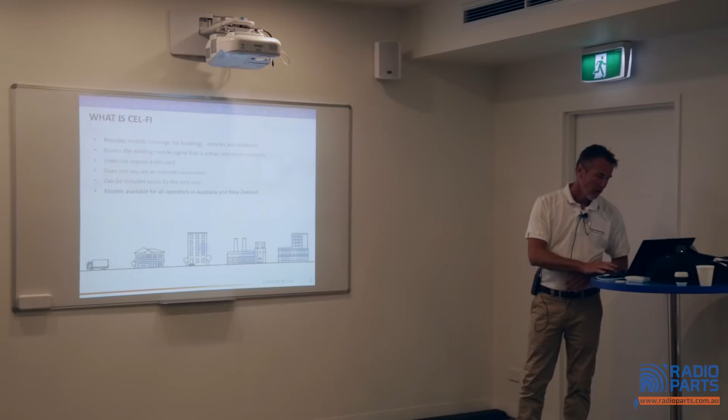What we're looking at here is a Cel-Fi. It's basically providing mobile phone coverage in buildings and in areas, vehicles, outdoors, indoors, in areas where the mobile phone signal is difficult. Sometimes that can be due to construction, location, lay of the land, etc., or even being in a regional environment, especially being out of range of the mobile phone signal towers.

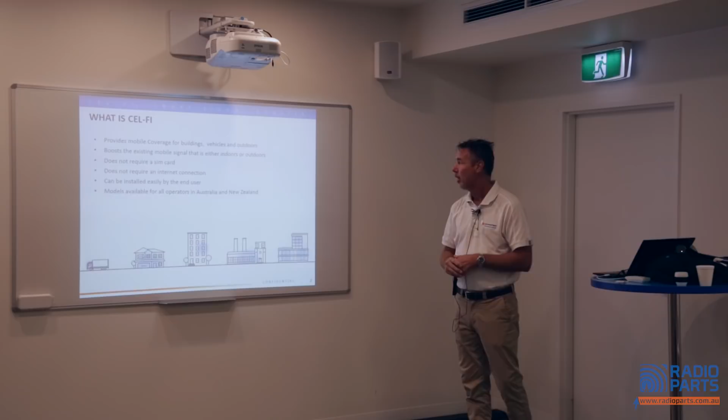The devices don't require a SIM card, so they're basically grabbing the mobile phone signal, reboosting that, and then broadcasting it back out. So I can't say Adam's phone can connect, Mike's can't, Geoff's can. It's basically rebroadcasting a mobile phone signal as it would be broadcast from the tower. They don't require an internet connection, so it's basically taking the mobile phone signal from outside or from a long distance away, grabbing that signal and rebroadcasting it out. Some of them are plug and play, others require installation, and we cover all the operators in Australia, New Zealand, the Pacific, etc.

These things are the only legal boosters in Australia, so everything else, if it doesn't have a Cel-Fi logo on it, is illegal. They need to go through a very extensive certification process, firstly with ACMA to make sure it fits within the guidelines of what frequencies it's going to operate in, and then to the mobile phone carriers using the identifications of their network to be able to work.

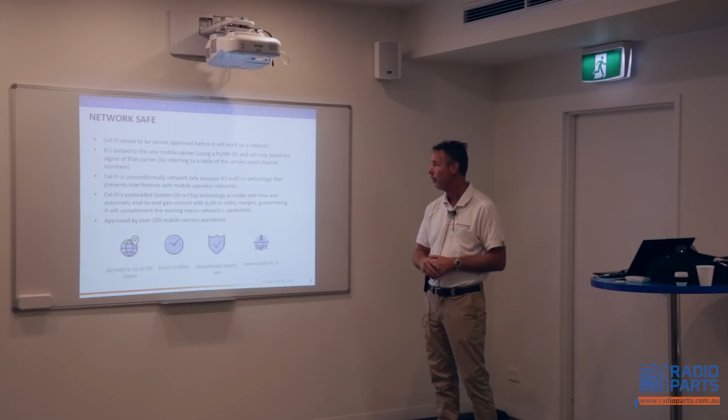So the Cel-Fi itself, while they look the same, has different hardware and configuration inside for the different carriers. So one that's suitable for Optus won't work on the Telstra network and vice versa. They're an independent box, with a slightly different chipset inside them, and can't be changed. They can't be reconfigured to work on the other networks. It's unconditionally network safe because of the technology it uses.

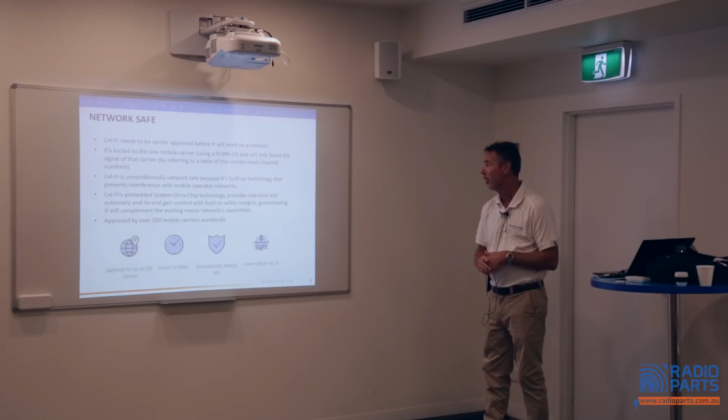And we were talking about before, that tromboning effect, over amplification. These things continually monitor the input and output, so the two antennas, if you like, and make sure that they can't see each other and start to create this tromboning or oscillation effect. It's an on-chip system, which is quite expensive to develop. It's patented. It's been a long time in development, and hence the hardware isn't cheap.

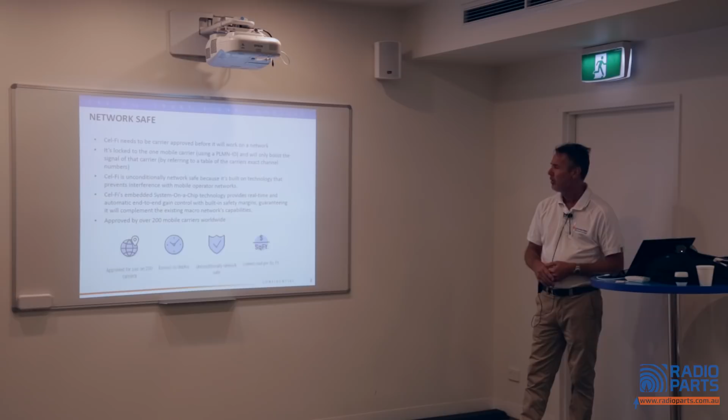So the cost of certification and approval, the cost of the technology and the development in the technology makes these things not a cheap item. So you know, you can't go and buy one for $100 there, like you could with the illegal boosters. And it's approved by carriers everywhere. As I said, some of them are plug and play, others aren't.

There's not many options when it comes to boosting mobile phone signal. You've either got what we have here, or an expensive, what we call a distributed antenna system, which is a license-based thing that a carrier would come and deploy. It's got a lot of hardware antennas strategically located around. You know, you're looking at minimum $350,000 to deploy a DAS, or a distributed antenna system. So the only options then are the products that we're going to look at now.

The benefits to the mobile phone operators are obviously new customers. You know, the customer goes and buys a plan, they spend $100 a month, but they can't use it in the house, so sometimes the carrier will say, here, take that, and set it up, plug and play, and away they go. It can help with customer retention, so if I had signal before, yet I've moved to another place and now I don't have mobile phone signal.

And it's a cheap way for the carriers to extend their network. And it can provide temporary coverage in areas for events or functions where mobile phone signal's a problem, where we've got a lot of people joining in to a particular function or event.

The range of the models that we have, and I'll go over and explain in a little bit more detail. What we talk about here is the bands, so the bands that the product will work on. These are the frequencies that it works on, so we have a 4GX, 3G, and 4G for Telstra. We have 3G, 4G, and some of the other 3G and 4G bands for Optus and Vodafone. These boxes here we call the Cel-Fi Pro. They'll boost 3G and 4G at the same time. And they're basically a plug and play item.

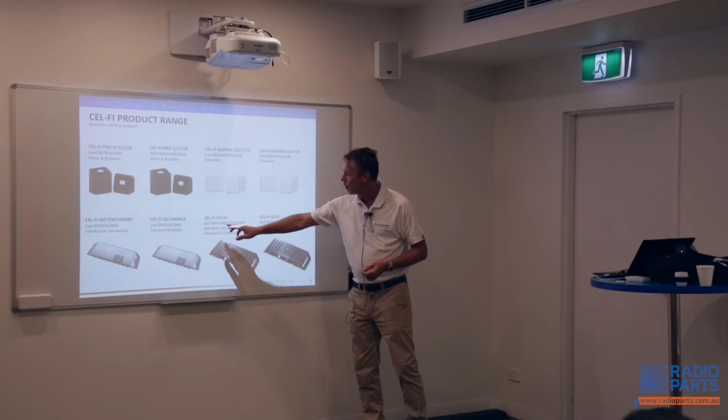Cel-Fi Go M and the Go X, these boost 3G and 4G at the same time, and are designed for Vodafone and Optus, and they have an IP rating, which means they can be installed outdoors. Splash, dust and shock resistant. Whereas these guys, you can basically plug and play with those. These require an installation, so they require what we call a donor antenna, getting the signal from the tower, and a server antenna, which is providing signal to the devices.

Cel-Fi Pro, just a basic example of what these are. We talked about it before, a network unit, which is grabbing the signal from the tower outside, communicating via an uplink and downlink in the 5 gigahertz band to the coverage unit, which is then putting out a signal bubble to provide coverage in that location. For indoor applications only, set up easily within a few minutes.

So you plug them in. This one looks at the tower, says, "Yeah, I'm a Telstra box. There's a Telstra signal. I've got that. I can see him. I'm talking to him." Bang, there it goes, and you'll see instant signal boosting on your phone. As the statement says there, the signal bubble or the output signal can't be greater than the distance between the 2 boxes. Okay.

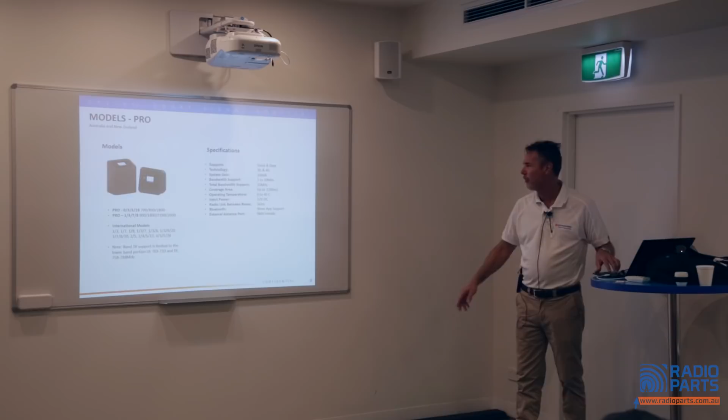A bit of the specifications on the things. So we've got a Telstra and Vodafone version, or Telstra Optus Vodafone version. You can see the different bands that they're supported, which means there's different chipsets and hardware inside the boxes. A whole range of international models as well. Suitable for voice and data, so increasing the ability to make and receive calls on 3G and 4G. High level of gain.

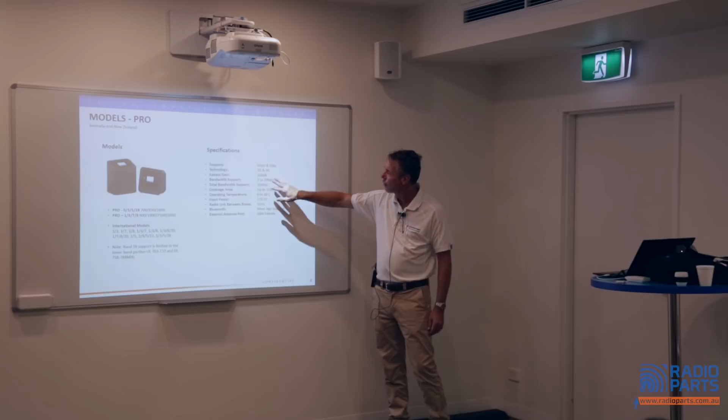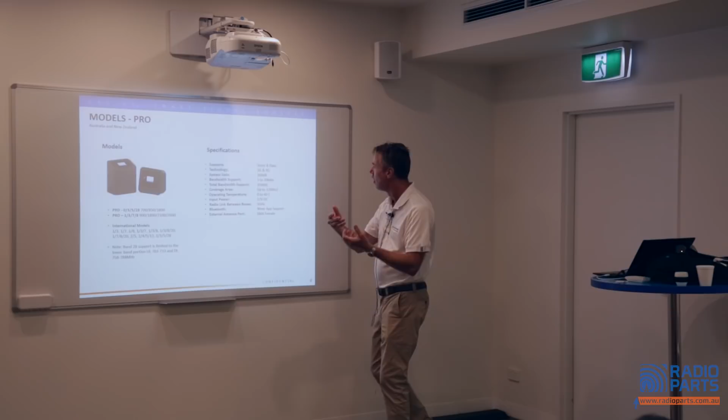Main difference I want to make you aware of here is on the data side. If you're directly connected to the tower, the speed that you get, like if you're doing a speed test or something like that from a data connection or internet connection, will be greater than it would if you're connecting via the Cel-Fi. The reason for that is the channel width, if you like, between the 2 boxes.

So if you're directly connected to the tower outside, you might get a high data rate. Once you connect to the Cel-Fi, even though we're connected to the same tower, the data rate will be much lower. And that's because of the channel width between the 2 boxes here, and trying to maintain communication in noisy environments, in this 5 gigahertz spectrum.

They operate on 12 volts, have a relatively high operating temperature range, and can provide up to 1,200 square metres, 30 metres by 40 metres, so it's not that big. Okay, typical house, small business, that type of thing. And the external antenna port is an SMA connection.

All the devices have Bluetooth connectivity into them, which means we can use a proprietary app to set the thing up and check the health of it and make sure it's working at its optimum. We'll have a look at that as well.

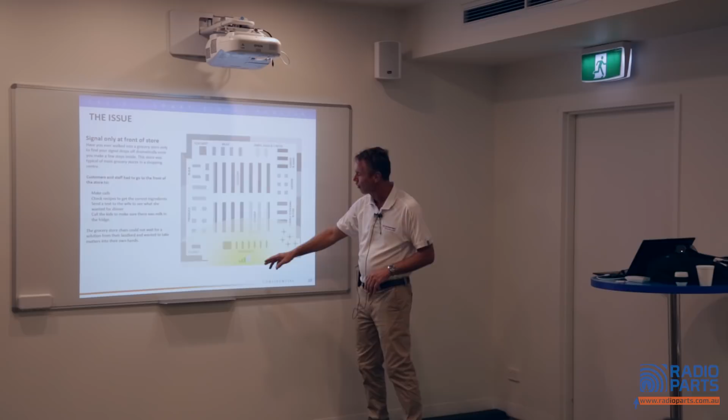Just an example here, a typical small business, grocery store or something like that. Front of the building near the checkouts, we've got a bit of signal there. Down the back, there's nothing. So you can't use your mobile phone for calls, SMS, check recipes, all that sort of stuff.

A solution in this example is to put a Cel-Fi Pro in, the window or network unit where there is the signal, and then the distance between the two boxes can be a maximum of 80 metres in a line of sight environment, up to the coverage unit, and it's providing us with a good signal throughout that location.

One of the problems that we see in the city areas is a lot of reflected signal, and even in the streets in some locations there's no signal. So, tinting on the windows.

What we find in tall high-rise buildings as well is once you get up above level 40, anything above that level there's no signal because all the antennas from the carriers and the mobile phone towers are pointing down towards the population in the streets and the buildings. So once you get up into the higher levels of these high-rise towers, there's no mobile phone signal.

Same sort of thing here, getting some signal from the outside near a window or a location in the building, the coverage unit in the centre of the building, or it could have been further up here if need be, and it's providing access to all the users in there. The devices aren't limited to the number of people who can be using them. That comes from the mobile phone tower.

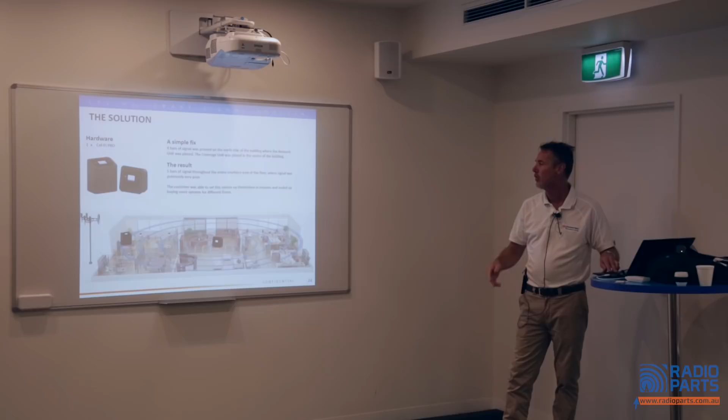So depending on the type of equipment that's at the mobile phone tower, the size of the cell and the licenses, etc., determines how many people can be using these devices simultaneously. A typical cell, those long skinny antennas on the mobile phone towers, typical capacity of one of those is between 50 and 250 users simultaneously.

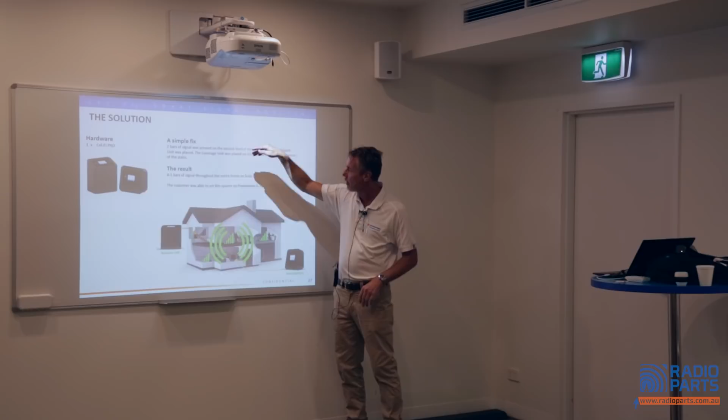Solution again, network unit in a location of the house where there is some signal, or we put an external antenna on top, can be high on a mast and pointed in a direction to grab the signal from up to 100 kilometres away depending on the type of antenna we use. Coverage unit in the lower floors here, and it's providing coverage all throughout the house and for all users.

It's worthwhile explaining at this point the difference between your signal readings on a mobile phone. So 3G, you know, the number of bars that you receive on your mobile phone signal, 3G is all about the signal strength, which in a 3G environment, the more signal you've got is a better call quality and a better data quality as well.

Whereas 4G not only talks about the signal strength but also the network capacity. So you could be very close to the tower but still be only getting 2 bars, and that's because it's not just taking into account you've got a great signal, the tower can be overloaded, and therefore we've only got a small data capacity, and that's reflected in the signal bars received.

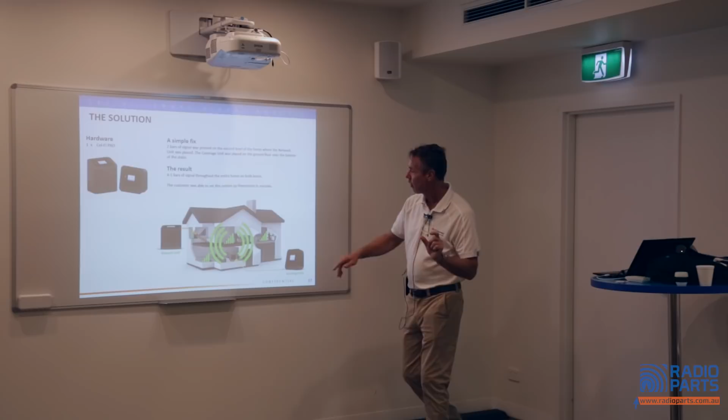So when we plug this in, the customer says, oh gee, I'm not seeing any improvement in my signal bars. Well, we're not going to do that on 4G, but if you switch your phone to 3G you'll see 5 bars straight away. So that gives you a good indication of what's going on.

The majority of mobile phones still in Australia will make calls over the 3G network. So in the event that you make or receive a call, your phone switches to 3G, and at the end of the call it'll switch back to 4G for your data. So it's worthwhile in some of the devices here where we can set them to boost 3G or 4G. We understand what the customer's devices are, what they're using it for, whether it's going to be for data or for improving mobile phone signal for phone calls.

The Cel-Fi GO then is suitable for indoor and outdoor applications. It will boost 3G and 4G, or 3G or 4G, with the current Telstra model. It's switchable via a button there, or you can do it through the Bluetooth app to set it to either or. You can leave it in automatic mode where it'll boost whatever it's got the best signal for.

These things aren't plug and play, they require installation. A couple of SMA connectors on each end, requires a donor antenna, grabbing the signal from the carrier, and then a server antenna or a series of server antennas to provide coverage for the devices in or outdoors. We can put a signal combiner or splitter on the server side and connect multiple antennas onto that to provide large coverage indoors and outdoors.

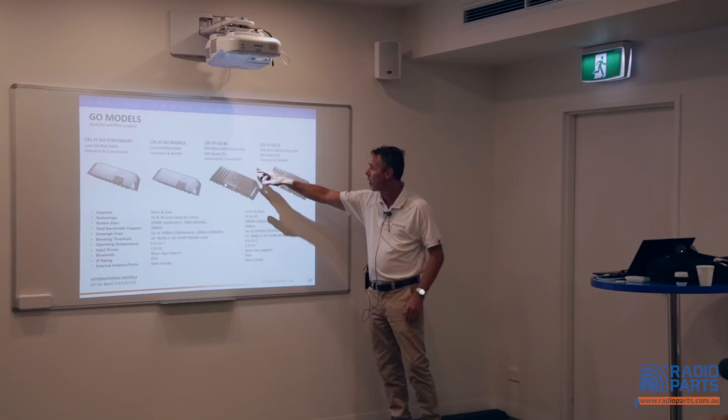These models there are for Vodafone and Optus, so they're supporting the Vodafone and Optus bands, and will boost both at the same time. Going to have a stationary version and a mobile version. The only difference between the stationary and mobile is its ability to switch between towers quickly.

In building application, we've got an external antenna, typically grabbing the signal from outside. Depending if there's plenty of signal outside but nothing inside, you can use a little omni antenna. If we've got to drag the signal from a long distance, it's beneficial to use a Yagi or a log periodic antenna, depending on the bands that we want to bring in. Connects into the Cel-Fi GO and then into a server antenna, whether it be a panel antenna or a dome antenna, depending on the type of output signal we want to provide there.

Same thing if we want to provide outdoor coverage, again antenna on the roof, coming down to the Cel-Fi GO, and then an external sector antenna which is broadcasting the signal outdoors to machinery sheds or garden, farm, aprons for transportation, wherever. In a lot of instances between these big metal sheds that are being built for warehousing, etc., there's no mobile phone signal between the buildings, so pushing it out for in between buildings is a common requirement as well.

Or using a combination of both, so having a combiner on this end, having an internal dome to provide coverage here, and an external antenna there to push the signal outside. Even using a small one of our sector antennas, depending on the level of boost.

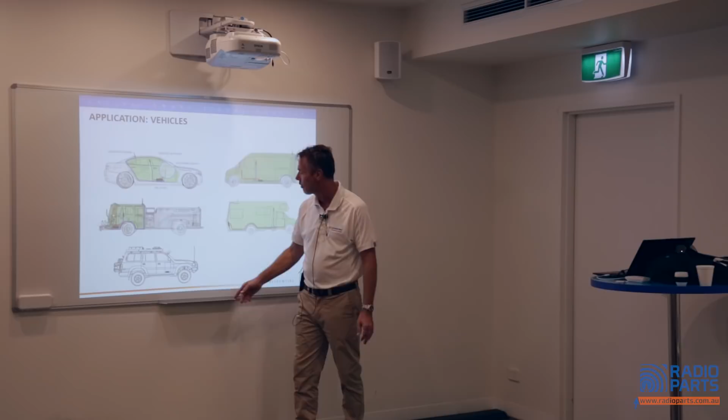We install, or our resellers install these in cars, boats, trucks, buses, emergency services vehicles. A typical application is in a 4-wheel drive, travelling, on the grey nomads or in the agricultural sector. External antenna on the bull bar typically. Cel-Fi GO under the seat, and to get the separation we'd put the server antenna on the firewall of the car, so it's got a metallic separation, so we're tricking the antennas into thinking that they're much further apart. A typical installation there would provide us with signal within the car there, and maybe a metre or 2 outside with the doors or windows open.

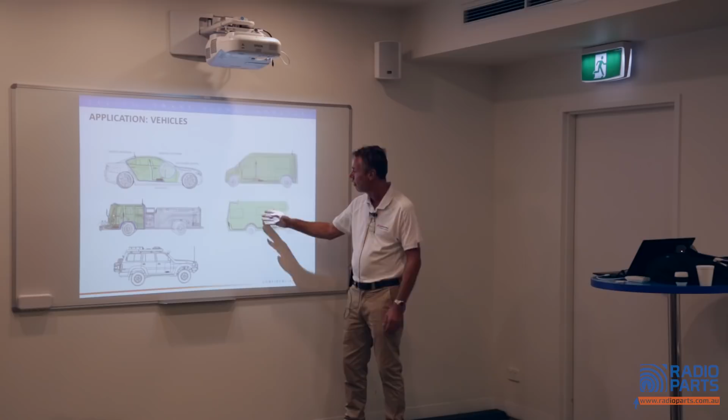Same in the emergency services or fire trucks, etc. We have to be careful what the truck or the cab's made out of. A lot of them are made out of fiberglass, so getting this antenna separation is difficult because the RF or the signal will penetrate through the fiberglass. So antenna separation is critical to the thing working properly, and that's the same with RV and caravans and that type of thing. What we look for there is in an environment where it's using a fiberglass cabin or space, we'd look for something like a metallic bridge to provide that separation for us to make these things work at optimum.

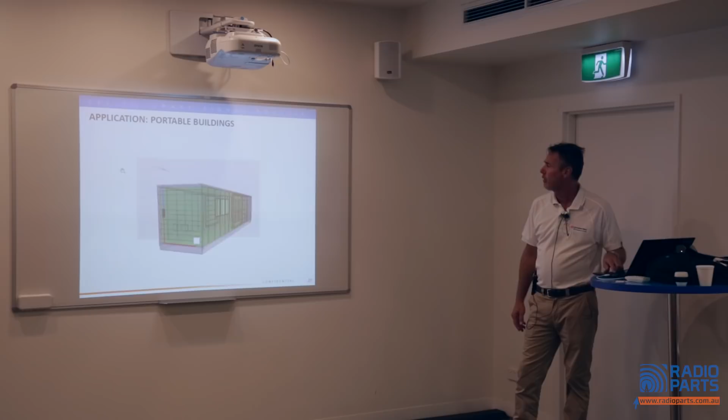Same on a boat, antenna up on the fly bridge, run the cable out temporarily until we get the highest level of boost and providing the signal bubble that we want. Trains, caravans, portable buildings, dongas, mine sites, that type of thing. Very difficult to get the signal outside here. These are like a Faraday cage, if you like, and a Cel-Fi PRO, one of the two box solutions, won't work in this environment because it's just too much signal flying around inside, not enough separation between the boxes, whereas the Cel-Fi GO external antenna, internal antenna will fill the portable building or portable buildings full of signal.

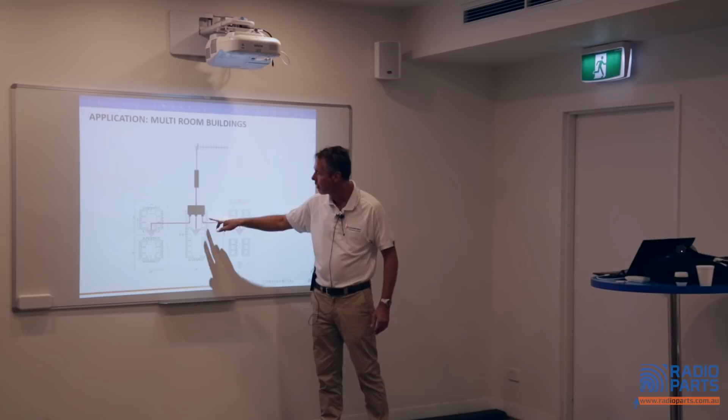Multi-room or multi-tenanted applications, so big warehouse with cool rooms, that type of thing inside them, or a lot of separation, or even just isolated business or office setups. So external antenna, Cel-Fi GO, splitter combiner, and then into multiple indoor antennas. So we're starting to provide a huge coverage signal. Multi-level car parks. An example of some of the applications that we've done.

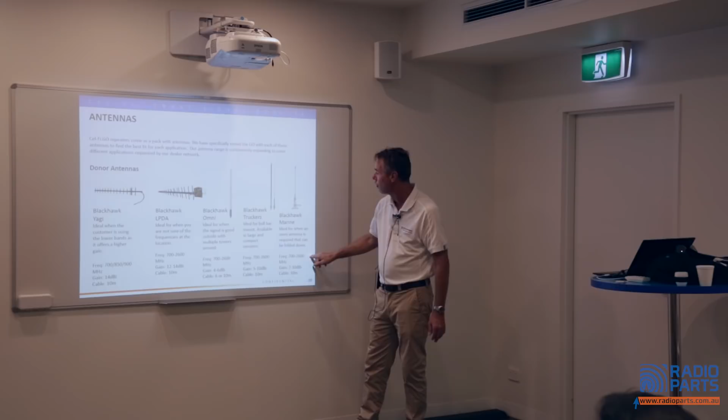All the Omni antennas are suitable for the higher frequency. So if we're looking at boosting 4GX and 3G only, then a Yagi is suitable. If we need to boost the 4GX, 3G and the higher frequency 4Gs, then log periodics or Omnis are more suitable for that.

When we look at the gain, gain refers to dBi, I being what we call a perfect isotropic radiator, which has zero gain and zero loss, so it's a perfect antenna. When we talk about gain, we talk about higher levels compared to a perfect radiator. You'll see there's variations in the gain across the board, and that's because gain isn't flat, it's not linear. At different frequencies, the gain goes up and down, so hence the level of gain adjusts accordingly.

Beam width, so obviously an Omni antenna, looking from the top of it, is providing 360 degrees. The higher gain has a narrower vertical beam width, so a lower gain antenna, while it's shorter, will have a wider vertical beam width, while a higher gain will be more narrow. So a higher gain Omni isn't always better.

It depends on the environment that you're in. If it's a hilly environment, you've got cell towers up on a hill, a lower gain antenna might be more suitable because it has a greater vertical beam width, whereas a higher gain is probably best used in plains and flat lands, if you like. Obviously, once we start using directional antennas, the beam width reduces, 30 degrees for the vertical and horizontal beam widths or azimuth, which means we can then grab the signal from longer distances and with less interference.

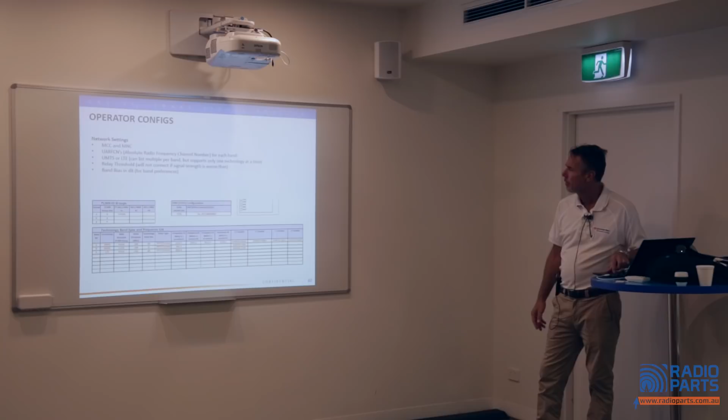We do a lot of the remote applications for remote communities, Aboriginal communities, stations, that type of thing. Large poles, solar powered, and then localised coverage around here. 400 or 500 metres isn't out of the question. Lots of accessories, small battery backups, 12 volt adapters for the cars. The devices all run on 12 volt. We supply solar if need be. Carrier configurations, don't need to worry about.

Basically an overview, we've covered that. That's it, gents. Any questions?

Just coming back to the registration, you're saying you register to the person or the address. So if that person decides to sell his home and shift, and decides to take that with him, he can then re-register? Yes. The address? Yep. And he must do that still? Yes. On the Cel-Fi webpage, there's a part to change your address. It needs to be updated. So if you had to go down the track, it can be done through that, you can just re-register? Certainly can, yeah. Re-register, a change of address, it's called, Leon.

One of the other things there as well is the mobile version of it. So even though it's travelling around Australia, it could be with the grey nomads or in a truck or car or boat or wherever, we've still got a registration address where we can contact the owner if need be to say, hey, seems like the carrier's identified your product is causing some problems. We need to get it back and replace it, or find out what's going on.

Anything else? What happens if a Telstra customer decides to change to Optus? They have to sell that one and buy another one. Yep. That's good for us. Yeah, yeah. You can sell them all day on Gumtree, eBay. There's not a problem with that. The hardware and the configuration is different inside the boxes. So with Vodafone and Optus, we can change from one to the other, but we can't change a Vodafone or Optus to a Telstra and vice versa. Different chipset, different configuration, and they don't work.